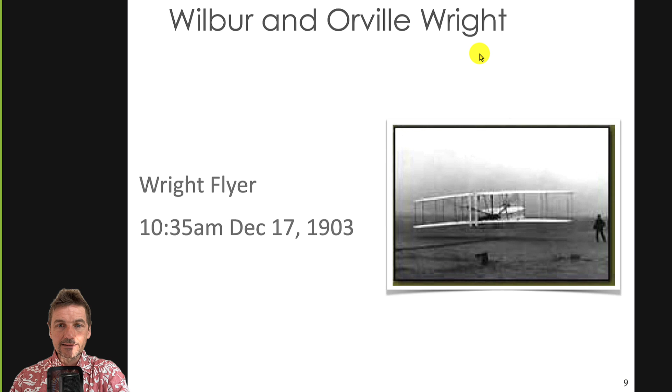So in our technology history, we have a very well-known pair of brothers, Wilbur and Orville Wright, who are the first people in our continent to have flown. That was in December 17th, 1903. They actually did a coin toss because they wanted to know who would fly first. Wilbur won, and so he started.

Unfortunately, the plane stalled and could not go further. Orville actually made the first flight, and that was on December 17th, three days later. That flight was about 12 seconds and 120 feet, so as you can imagine, that was really quite short as a flight.

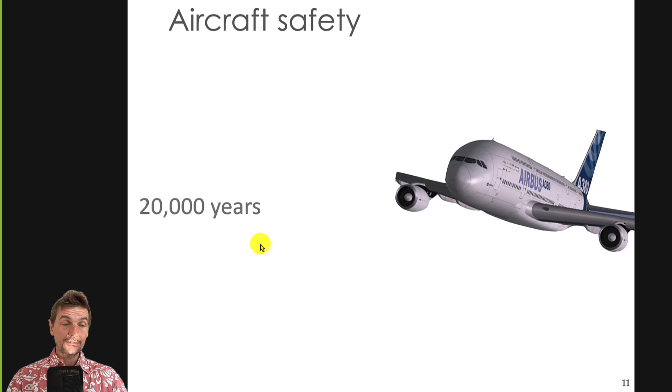So this is just to tell you where things started. Today we are quite a long way away from this, because we could, as you can see, fly for 20,000 years without having an accident. If we flew continuously for 20,000 years, statistically we would have no accident. So it means we can safely fly during our life, and most likely we will not have an accident.

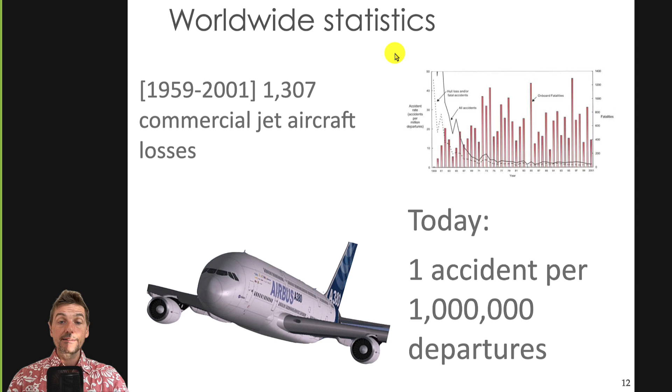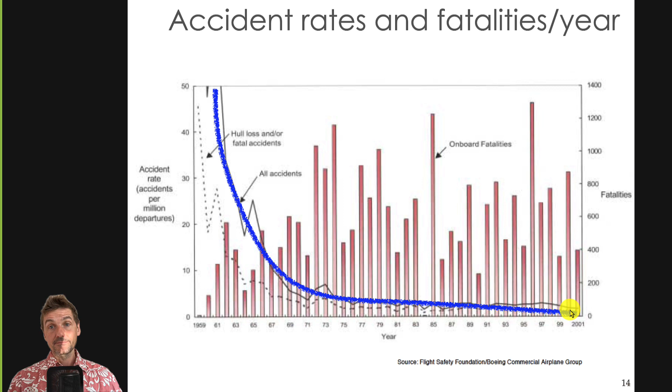If you look at the number of accidents per departures, you have approximately today 1 per 1 million. So every 1 million planes taking off, you have one accident. So it's really very few. And if you look at what happened over the years, the number of accidents is decreasing significantly, and usually these accidents are due to human error. They are not due to something else, right? So there are plenty of examples of this.

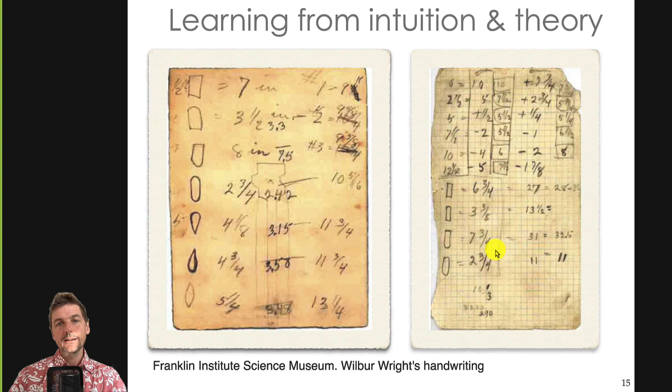Originally we were really working from intuition and theory, and from experiments as well. These are the notes that the Wright brothers had, in the Franklin Institute Science Museum, and this is Wilbur's handwriting. You see here he thought at some point that you should have a square section for the wing, or maybe at the end he thought about that section. He did some calculations on the side to figure out the best version of this. I thought this is very useful to think about, because not only do we work from some sort of intuition, since the mathematics weren't there yet, but we also learn from experience.

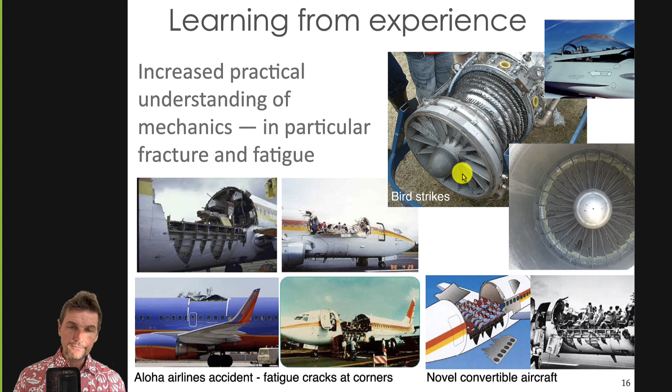As you can see, you also have bird strikes, which can completely destroy the engine. All these things are very useful to know, because you cannot predict them until they happen. So now they are doing experiments on Rolls-Royce engines where they throw real birds inside the real engine to figure out how it works, and they also perform numerical experiments of that type of engine being hit by a bird.

The other thing which taught us a lot about fracture is the Liberty ships. This was during the Second World War. You may know that the US were bringing a lot of food to the UK using boats, and these boats were usually the target of U-boats, the German Nazi submarines, which were targeting these boats to get rid of the food and other things being brought to the continent and to the UK.

That was a very good idea, and on top of that, because the boats were sunk so frequently, a lot of boats needed to be rebuilt. What happened is very interesting. You may wonder what could possibly have happened to these different boats because of the way they were built.

So this is very interesting, and I think it's worth thinking about, that we learn from intuition, we learn from design, we learn from experiments, and we learn also now from science and mathematics and mechanics, but all these things took really a long time to be built.

If you look at the terrible cases of shuttle crashes, again, these things happened because of very small details, like in that case, it is believed to be due to one of the little squares on the surface of the shuttle, which was slightly off, and that created some sort of problem during the flight, during the takeoff, which then led to the destruction and killed the astronauts. And this was also due to very small, minute problems in the structure of the aircraft.

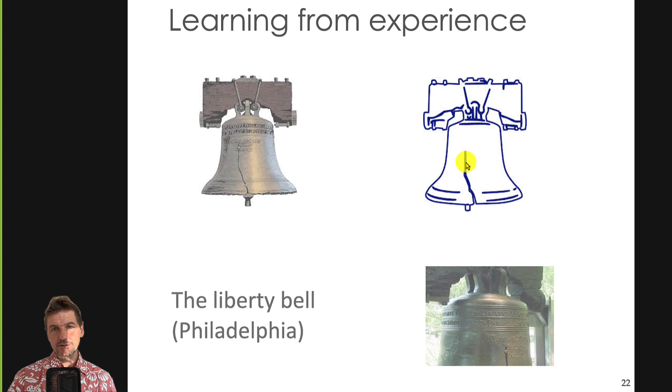Similarly, if you look at the Liberty Bell, which was in Philadelphia, people were wondering how to arrest a crack, and what was done is something that's quite counterintuitive. The bell was taken and a little hole was dug at the crack tip, because by digging a hole, you can decrease the stress intensity factors, decrease the energy available for fracture, and therefore the crack will not propagate. So this is something really interesting also to keep in mind.

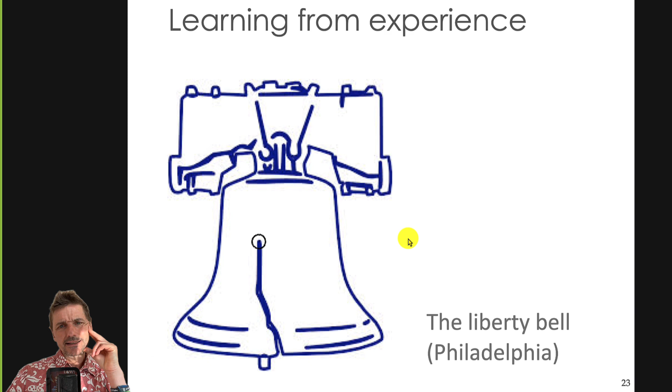So one of the key questions that you have when you work on fracture of homogeneous materials, but fracture of any material in general, is the question: when should a structure be inspected for flaws? How do we figure out when a structure should be inspected? Should we do it every flight, every million flights, every 10,000 flights, every 100,000 flights, if we're talking about an aerospace structure, for example?

So these are the questions we want to address, and how are we going to address this? One of the most simple ways is to assume that a pre-existing crack lies in the structure, with a certain size fixed by the design codes. Once you have that crack, which is fixed at the beginning, it will propagate according to a certain type of rule using certain types of codes. This is very codified and done in very strict ways.

For example, one of the codes used in the US by the FAA is called NASGRO or AFGROW, which is a code that will tell you, based on the principal stresses in the plane where the crack is located, how many cycles it will grow, and it will give you an idea of the shape of the crack.

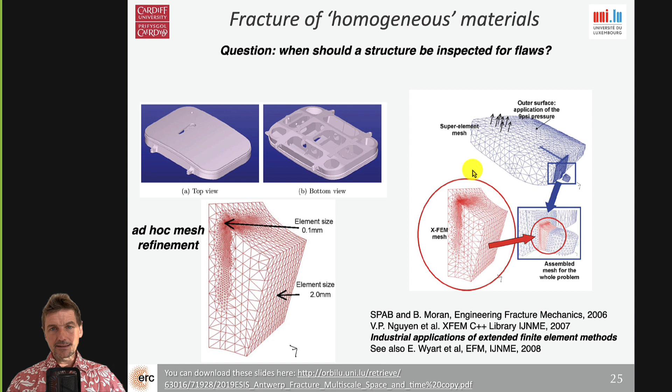So my method, which was designed by myself and my supervisor, Brian Moran, allowed us to look at much more realistic cases, which in fact led us to different fatigue lives and allowed us to make very nice work forward in that area. And now these ideas are implemented in commercial codes, for example, at Cenaero in Belgium.

The second question about how to look at fracture of homogeneous materials is how do you deal with the accuracy of your simulations? If you look at a homogeneous material, you have certain assumptions - you will assume that the fracture is linear elastic, usually for aerospace cases, because plasticity is forbidden in these design codes. Plasticity would actually help dissipate energy and decrease the crack propagation rate, and what is wanted in aerospace is a very conservative approach to ensure you have the worst case scenario at hand.

To know more about this, you can refer to the short course on partition of unity methods and free boundary problems, where we discuss how to go around the problem of meshing the cracks as they propagate. There are many approaches, including finite element methods, extended finite element methods, mesh-free methods, and boundary element methods with isogeometric analysis, which is here. This needs to be done in detail, which I refer to the course on partition of unity methods.

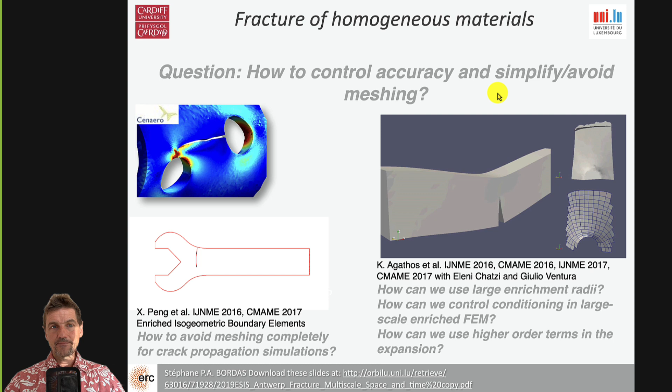Similarly, in the course on partition of unity methods, we talk about goal-oriented adaptive methods, which allow you to refine the mesh locally around the area where you think the crack is. Before these methods were incepted, during my PhD, what people needed to do is put a crack somewhere, and the mesh in the whole region where you thought the crack would propagate had to be pre-generated in a very dense manner, with very many elements in the whole volume where the crack would propagate. This is of course very inefficient, and quite brute force.

The idea of using adaptive computational methods is that you start with a crack as dictated by the design codes, but the mesh is only refined in the vicinity of the crack, not everywhere. As the crack propagates, it leads to refinement of the mesh only locally around the crack front, as you see here, not everywhere else where it's not needed.

The novelty in what we did compared to others is that we targeted the stress intensity factor. We did not target the energy, which is meaningless, but the stress intensity factor, which is the crack driving force. This is what allows the crack to propagate or not if we reach the critical stress intensity factor, and under fatigue conditions, it allows it to propagate at a certain rate, because as you can see in the short course on fracture mechanics, the amount by which the crack grows in models such as Paris law is directly proportional to a certain power of the stress intensity factor.

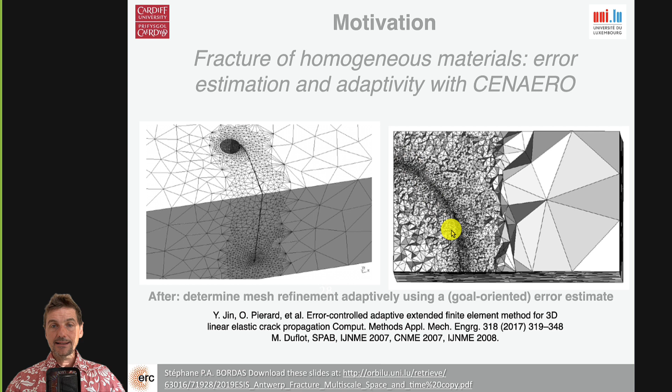We saw at the time that if the stress intensity factor is computed slightly off, then the whole crack propagation path can be wrong, because each increment will be off and you cannot heal the crack. Once you've made a mistake in the propagation, you have a history-dependent simulation which cannot be cured. So this is very important - think about error estimation and adaptivity with a goal in mind, as opposed to simply doing adaptivity using, let's say, energy as a target.

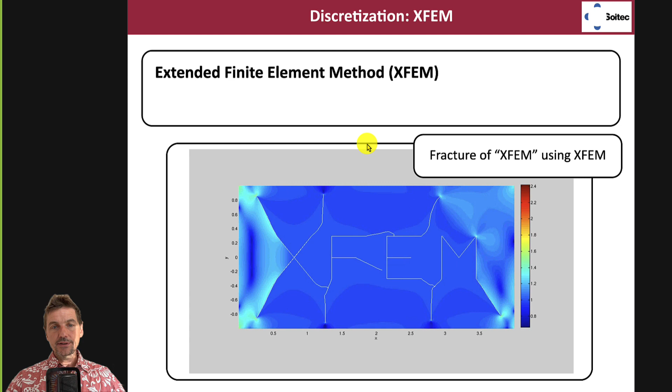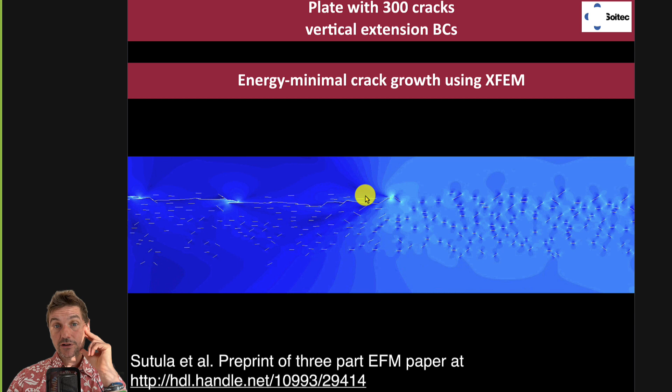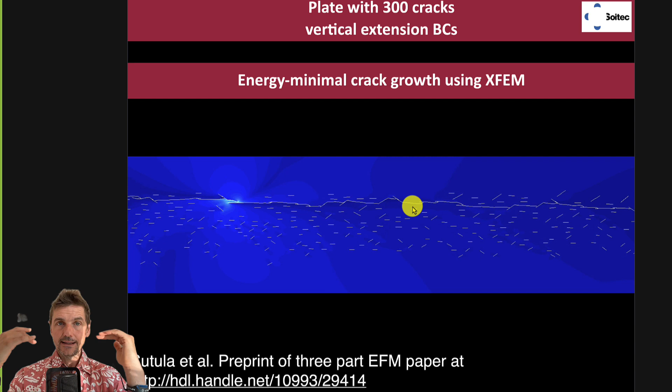We also talk in the partition of unity method course about the extended finite element method, one of the ways you can discretize fractures. We also talk about the fact that if you have multiple cracks, like here 300 different cracks, the idea would be to figure out which crack should propagate to maximize the energy release globally - to minimize the potential energy in the best possible way. You don't know which of the 300 cracks, or which of the 600 crack tips, should propagate. The work of Danas Sutula, which I explain in the partition of unity course, clearly shows how to do that systematically for as many cracks as you like, in a very nice and beautiful way, all implemented in MATLAB and available for free. That led to extremely nice results.

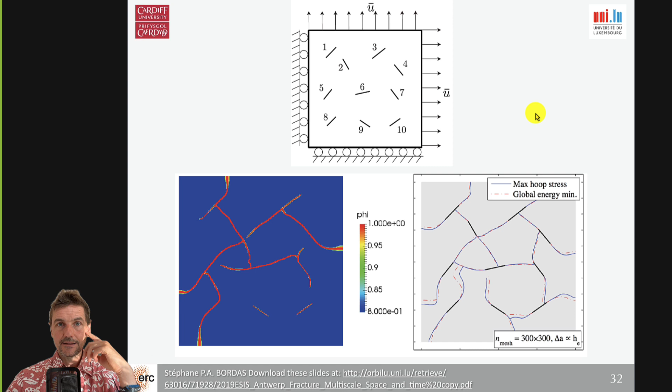We also talk in the partition of unity course about the comparison between energy minimal fracture and phase field approaches.

We talk about the fact that we can look at arbitrary materials that can also be inhomogeneous. This is now the first step into inhomogeneity. What you see here is a solder joint that's used for printed circuit boards.

You can imagine that current is going to flow from the top to the bottom, for instance. This is a tin silver copper alloy, and these tin silver copper alloys make polycrystalline grains. They have grain boundaries, and typically the grain boundaries are the areas which are the weakest, so they are the areas where the cracks will tend to propagate.

So this is why, in that case, we have a model where the cracks initiate along the interfaces. We compute the damage around the interfaces, and when the damage, due to mechanical thermal fatigue, increases beyond the threshold, we crack the whole grain boundary.

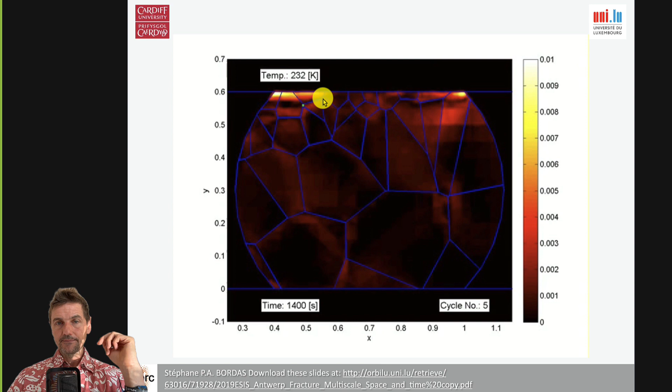And then we look at the propagation of the cracks, and what happens is that at some point a crack will grow, and all the small cracks will coalesce, and the whole grain, the whole solder joint, will be failed.

Now what happens here is that we have one solder joint and we have all the grains taken into account explicitly. On a printed circuit board, you have hundreds of these solder balls. And what we would like to know is when they will fail, because that can lead to electric defects in the car.

Due to the car starting and stopping several times a day, and the cold climate, they start at cold temperatures and heat up at high temperatures several times a day, these solder joints can fail, and when that happens, you have red lights lighting up on your dashboard. So the question is, when is that going to happen?

Note, this is very important, that here the grains are of the same order of magnitude in terms of size as the structure. You see here the structure is not much larger than a grain—maybe 5 grains in the length and 3 grains in the vertical direction, depending on the grain size. That's very important, because here we have, and this is a keyword I will use today for the first time, no scale separation, because all the grains have a size similar to the size of the structure.

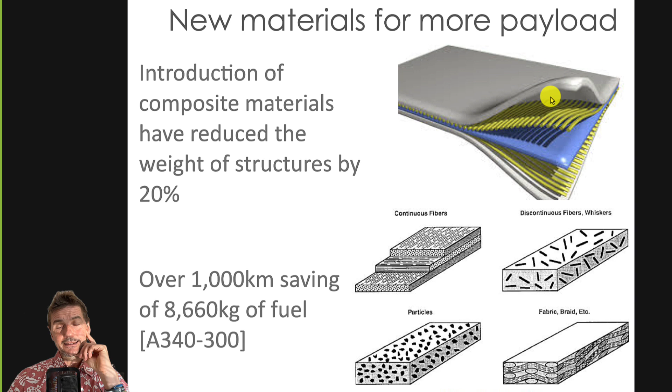So now I've convinced you, I think, that there are different types of multi-scale approaches. There are some problems where the size of the microstructure is similar to the size of the structure—that would be, for example, the solder joints I showed. But there are other cases where it's not the case.

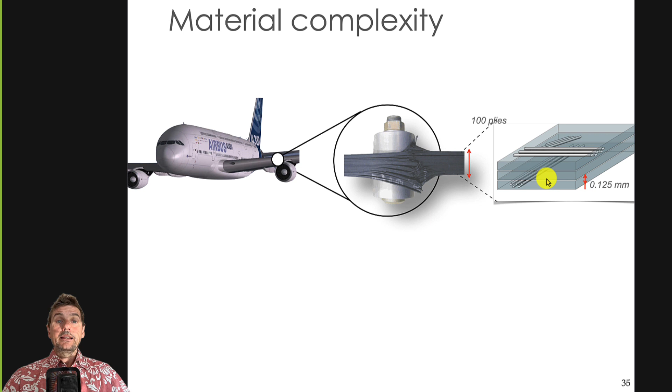For example, here you have a bolted joint, 50 millimeter bolted joint, 100 plies, 125 microns per ply, with nanoscopic fibers. If you look at this particular case, you have a heterogeneous multifunctional material, and you need a certain number of experiments, similar to Paris law, to be confident that the coefficients of Paris law that everybody uses, C and M, are correct.

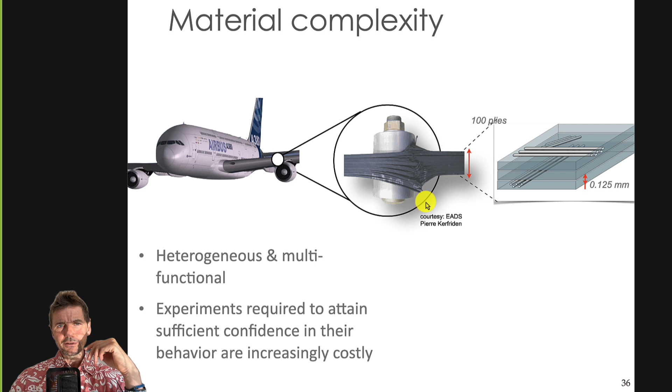Thousands of experiments were carried out. So here, in order to gain understanding about these bolted joints and these materials that we built, a lot of experiments and numerical simulations are also required.

So how can we do that? Well, one of the problems is that we have quite a different environment in real life than we have in the lab. It's quite difficult to reproduce the environmental conditions. So those are quite difficult problems to solve.

The second problem is factor of safety approaches. Let's say we computed 10,000 flights for the Airbus. Since we computed 10,000, we put a factor of safety of 2, so we say it's not 10,000, but 5,000. We are conservative, we try to decrease the risk. This is what you typically do in engineering when you don't know something. What you do is you lump all the unknowns into what's known as a factor of safety.

Also known as probabilistic-based methods, but these things cannot handle unknown unknowns, because there are things you don't know that you don't know. For example, the fact that you will maybe have some sort of storm - you don't know exactly when. You don't know the hygrometry, the temperature exactly, the wind patterns. You don't know everything that goes around the plane.

But there are many things you cannot guess, because the airplane may be flying in environments you have no idea about. It can actually be easier to understand if you think about spacecraft that will go explore the universe, because in that case you do not know what will be found there - you've never been there, and you don't know the conditions in terms of cosmic radiation, atmospheric conditions, corrosion, bacteria, viruses, temperature, or even simple chemical reactions that can take place there.

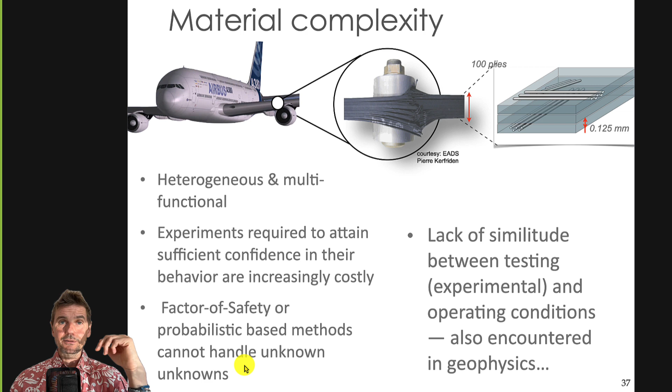So it's very important to realize that the more you can guess, the better. But it's even better than not guessing to put sensors on the structures. And the question is which sensors, in order to be able to make proper designs.

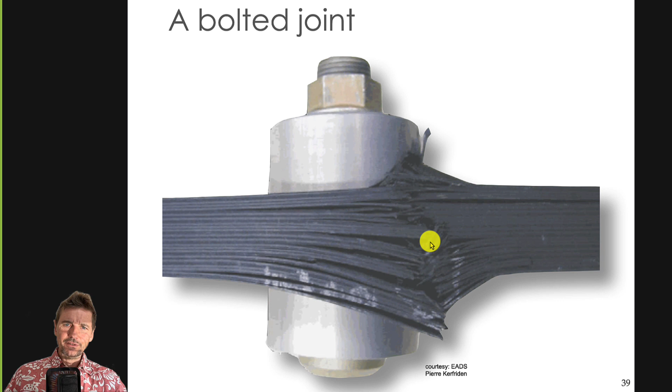So now let's look at numbers. If you take a bolted joint from an Airbus A380, for example, you have a mixture of metal and these carbon fiber composites here. When these things fail, this is what it looks like - not very nice. You have delamination, debonding, the fibers get loose and get pulled out of the matrix. These things are extremely negative and detrimental to the life of the structure, so you would like to be able to predict this.

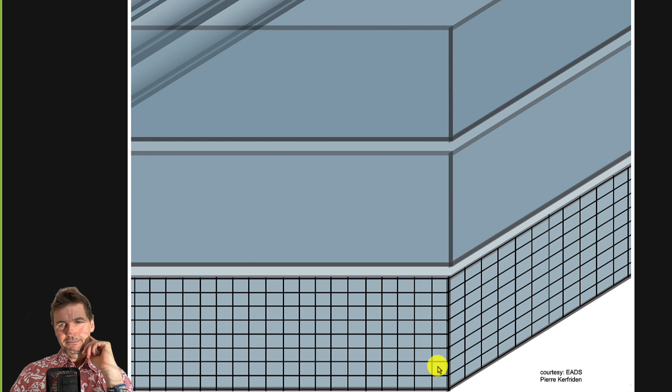So let's just look at a brute force calculation of this bolted joint. How many degrees of freedom do you think that's going to require? Let's look at just a few plies, and assume about 10 elements per ply - that could be overshooting, but let's assume that. If you assume a 50 millimeter bolted joint, that's about 2,000 elements. Say 50 millimeters by 50 millimeters times 100 plies in the thickness, which is typical - in the end you get 2 billion elements.

So 2 billion elements is something which is solvable. You can solve that on supercomputers today, if you have the proper code, of course. It would also need to be a fully parallel code using MPI and domain decomposition and so on. That was the PhD thesis of Pierre Kerfriden at LMT Cachan in Paris, École Normale Supérieure. But this is, I have to say, a bit brute force.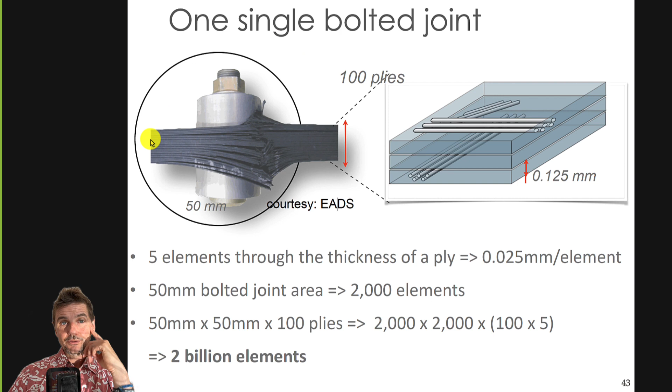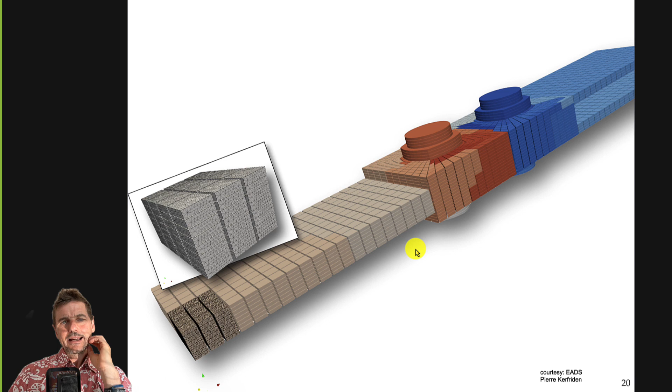So what you'd like to do is reduce this complexity, to be able to solve such problems much faster. This is the PhD thesis of Pierre, as I was saying. What he did is divide all the plies into sub-blocks, and each block was sent to one CPU. In this case he had something like 450 or 512 CPUs, if I remember correctly, and he could solve that in 1 week at the time - so in 2009.

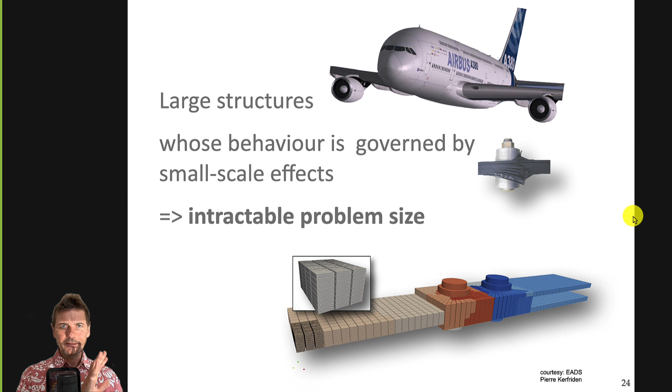So this is exactly the problem we're trying to address today: how do we deal with large structures whose behavior is governed by small-scale effects that lead to intractable problem size? This is the question we would like to address today. And again, we will do it via two ways: one will be algebraic-based - model order reduction, artificial intelligence, machine learning - and on the other hand, it will be done using mechanics and physics-based methods only.

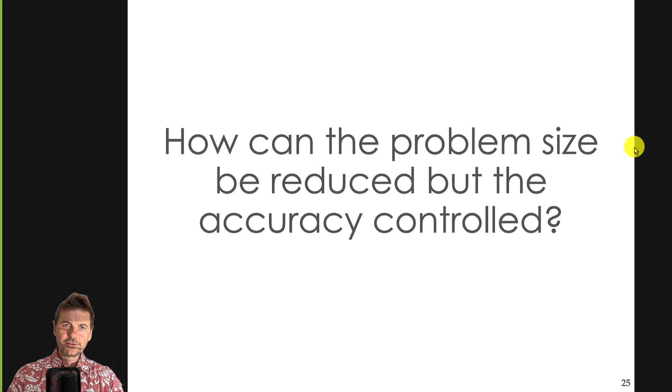Here's the question: how can we reduce the problem size but keep the accuracy under control? So how can we do this? This is really the question that we need to answer.

So the first thing is that we have a certain challenge. We want to preserve certain features and reduce the problem size at the same time. And that will allow us to reduce the computational expense and therefore control the error.

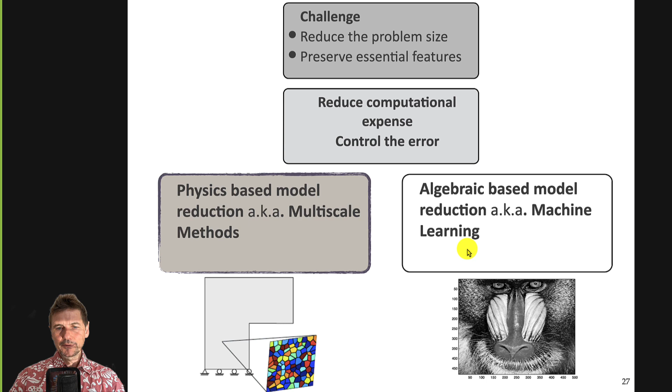We will talk about two approaches. One is physics-based and the other is, let's call it machine learning based, but we could also call it algebraic based. And let's understand why there is a nice monkey on this picture. But we will do that after we have talked about physics-based approaches.

In the next part of the talk, I'm going to convey to you what means lack of scale separation, and I'm going to do it from both the reduced order modeling and from homogenization, meaning the physics-based approach. And I'm going to link these two together.

Remember in the course on how to create a mathematical model and how to discretize and how to control the discretization error using a posteriori error estimates, and the model error using appropriate models for the problem that you're solving, and trying to address the question: are we solving the right problem? And the verification question: are we solving the problem right? Meaning, are we solving the PDE properly? Is it converging? Is the solution accurate enough?

Can we capture the discontinuity or the singularity in the solution? That's the discretization error. And the model error, what is the question to the validation? Are we solving the right problem? So today, which of the two questions do you think we are asking?

We are talking about multi-scale approaches. So we are mainly asking the model error question, because we don't know whether we should have a model at the coarse scale only, like for unidirectional composites, the thesis of Lisa Cahill that I showed before in the fracture mechanics course.

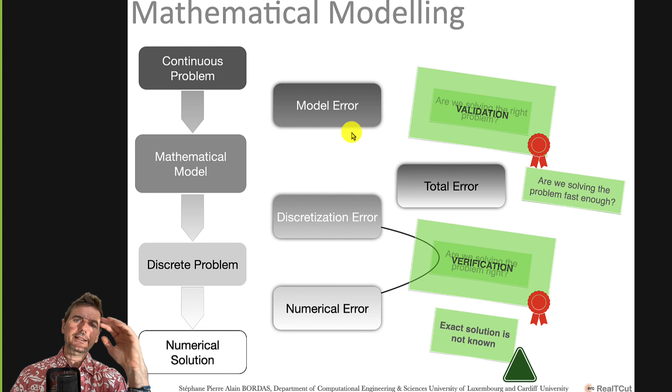And we don't know if we need to take into account all the grains, like in the solder joints, explicitly, all of them. Or we don't know if we could maybe do some averaging and have a few grains taken into account and then use homogenization to do it. So that we don't know. And this is the question we are trying to address today.

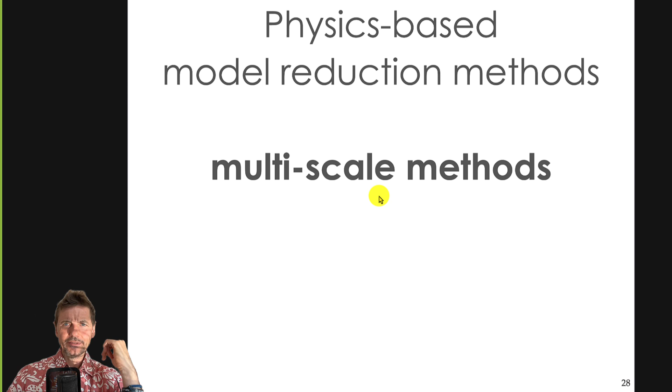So to do that, we're going to look at the first class of methods that I call physics-based model reduction methods. And I'm going to explain why I believe that the name physics-based makes sense. First of all, let's look at a typical example.

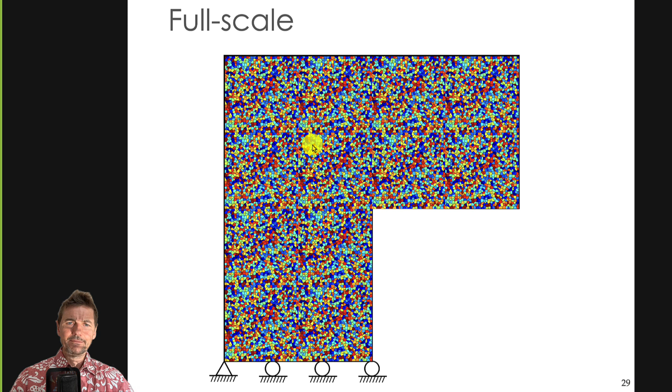By taking explicitly into account all the grains, knowing, and this is very important, that each grain here that I choose will have different properties to the neighboring grain. Point number one, it will be anisotropic. It will have a specified direction which is of interest, and only of interest to that grain. The neighboring grain will have completely different properties.

It will have completely different fracture properties, completely different dislocation dynamics, completely different Young's moduli, so elastic properties, Poisson's ratio in different directions, so stiffnesses will be different. Temperature parameters will be different, coefficients of thermal expansion will be different. So everything will be different in these little grains. There are no two grains in there that are the same. They are all different in shape, different in material properties.

And not only that, that would be too simple, but if you keep zooming, you will see that there is an interface. And this interface between the grains will also be different for all grains. So there are not two interfaces in there that is the same. So you can imagine the problem complexity of dealing with hundreds of thousands of grains with dissimilar interfaces, dissimilar material properties at each grain, and doing that on hundreds of thousands of grains in one structure.

And we're talking about 2 dimensions. If you think about several dimensions, like 3 plus time, then you immediately understand that there are some severe difficulties in dealing with that.

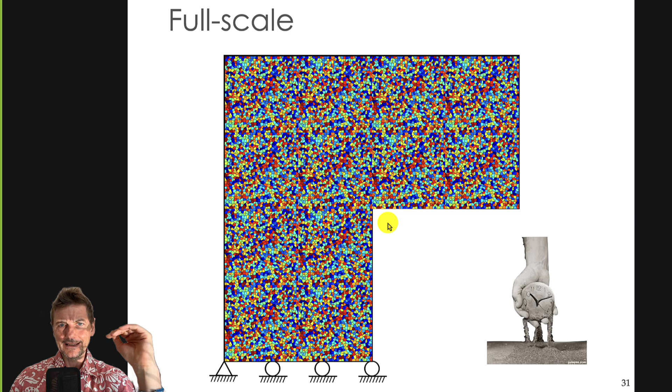So now you would like to replace this particular microstructure by a PDE, a partial differential equation, with constant coefficients. So you see here, big problem. Here everything varies all the time.

So if you were to draw some sort of variation, if you take a line from the left to the right and draw variations of any of the properties, you would see a huge amount of variation. It would jump up and down constantly. Now what you want is one PDE with constant coefficients in there. So of course that is the main difficulty of multi-scale approaches.

So how do you do that? Well, the thing is, you try to replace the heterogeneous nature of this problem by something smoother, and you do that at the scale where the predictions are required. For example, you would like to just send your simulation in a computer, go take a coffee, come back, and boom, you have the solution.

How do you do that? Well, the idea is that at each material point in the structure, you will have one point which is represented by another volume, supposed to represent what happens at that material point. Which means if you go to another point, you will have another volume which represents another material point.

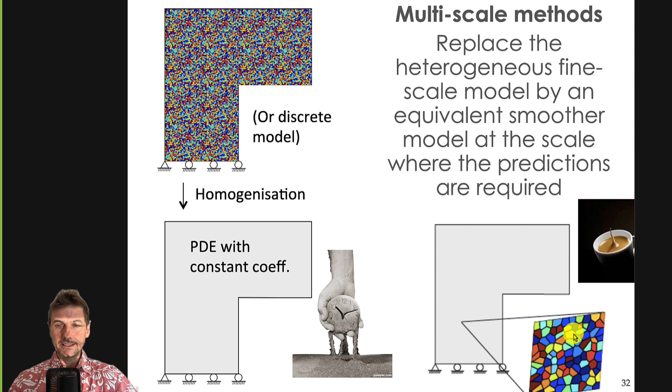In some region you have a full description of the microstructure, and in other regions you don't. This is known as concurrent methods. And the difficulties in concurrent methods—you guessed it—what would you think the difficulties are?

Well, yes, the difficulties are the interfaces between the two domains. Why is that? Because you need to make sure that you keep continuity of the field variables across these two different representations of the domain.

Here on the left-hand side, you have to deal with a continuous and constant coefficient PDE. On the right, you have discontinuities through the grains, and you need a continuous transition between the two. Otherwise you'd create a jump in the displacement field, which you don't want, and a jump in the strain field, which in that case you don't want either.

So if you create jumps or incompatibilities between the two domains, depending on what problem you're solving, you are not addressing the problem properly. So you need to make sure that works.

The second problem you can have at the interfaces is looked at in detail by papers by Belytschko and others at the time, in methods known as the bridging scale method or the bridging domain method, where he's trying to merge two domains.

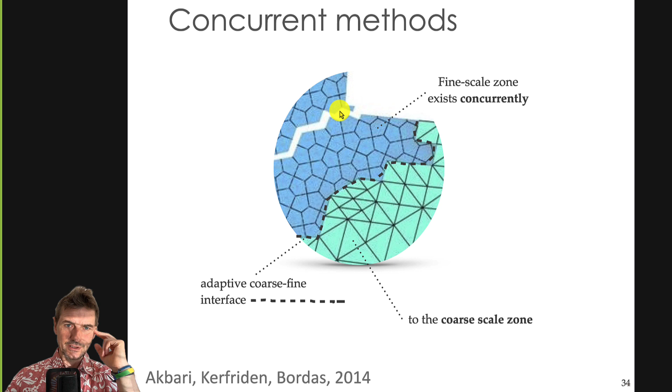So these are concurrent methods, as I was saying. You have an interface that you need to take into account, and you have a coarse scale zone and a fine scale zone. In the fine scale zone happen all the things that you're interested in, for example crack initiation, crack propagation, and so on. So I think this is extremely useful to know.

As I said, this can be done for molecular dynamics as well. Here you have a fine scale zone, and this is reported in the paper by Talebi, Ramaia, Rabczuk, Bordas, and Kerfriden in 2014, now 9 years ago. What we did there is we had a molecular dynamics region, which was coupled to a full finite element region, which you can see here. What was happening is that the crack was propagating in the molecular dynamics zone, which allows you to use a full-fledged molecular dynamics approach in order to initiate and propagate the cracks. So it's very desirable, of course much more expensive.

Similar to the coupling between mesh-free methods, where you have particles, here you have molecular dynamics, so you have atoms. The connection between atoms and particles is quite close, so you can think about them this way. And then you have an interface where you attempt to conserve energy. This is the main point.

And then once the crack has propagated, the idea is that you do not want to keep all the particles, all the molecular dynamics atoms, behind the crack wake. Because behind the wake of the crack, you don't need all these atoms anymore. Nothing is going on. Once the surfaces have separated, the potential energy here is not important anymore, so you can just get rid of the particles and you can coarse grain.

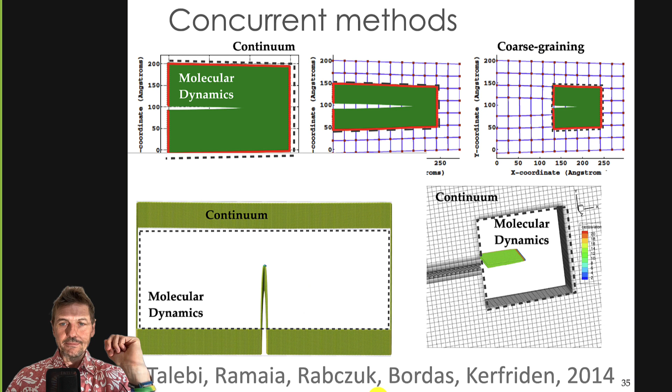Again, it's in this paper, and we show how things work. So that was for concurrent methods. That was a very short introduction, and I will do another lecture with more details on this. So this is only now to show you what you can do in terms of not concurrent, but now semi-concurrent or hierarchical methods. Let's try to figure out why it's called hierarchical methods.

So the idea in hierarchical methods is that you have one domain which speaks to another domain. So there is a hierarchy in the domains. There is a domain at the coarse scale, so large scale, and there are domains at the fine scale, like the representative volume elements. And the question is, how do you link the fine scale to the coarse scale?

And so this is how it's done. Let's imagine that you have a mechanics problem at the coarse scale, so you have finite elements. And let's imagine that at each of these points in the elements, you can think of them as integration points, so material points. Each of those points is now associated with a representative volume element, which on purpose I did not define properly because this takes a long time to define properly, and it's still subject to discussion.

But suffices to say here that you have a representative volume element, meaning that this is the smallest possible volume which represents the statistical variability of the fine scale. Meaning if you take it larger, it is too large, and if you take it too small, you do not see the statistical variability. For example, a typical representative volume element could not be smaller than one grain, or an aggregate in concrete. It will need to handle at least a few aggregates and some of the cement paste, such that you have a good variability in the aggregate size, that you have at least a few aggregates, and that you have at least some of the cement paste. So that sounds like heuristics, and it is, but in reality you have some very clear tests to make sure that the representative volume element is indeed representative, and to know when it's too large or not, right?

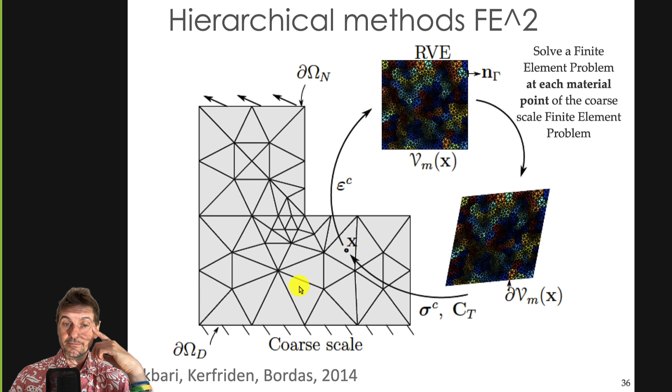So that's the key about hierarchical methods. And now we're going to see when hierarchical methods break down, because of course they do. All methods break down at some point, and we would like to see how it works.

So the first question is, what happens? Here we have two axes: sigma c and epsilon c. C stands for coarse, because we are living at the coarse scale at point x in a finite element at the coarse scale. And what we are drawing is the loading of this element. So we are considering only one element that contains one point x, and at that point x we are increasing the load. Or you can think of it as increasing epsilon c, because we are computing at this element the displacement field at the three nodes, u1, u2, u3. Based on the shape functions inside that element, we are computing the strain field at point x.

And based on that, we are passing the strain field computed by shape functions to this representative volume element, and computing the stress field and the tangent stiffness. The displacements on the boundary of this element are varying because we are increasing the load. So we may start with a small load of 0, then we increase the load, and we will follow that curve. What we are doing basically is drawing the stress-strain curve for that point without having any analytical formula for the stress-strain curve. If you take into account elasticity, the stress-strain curve will be a line.

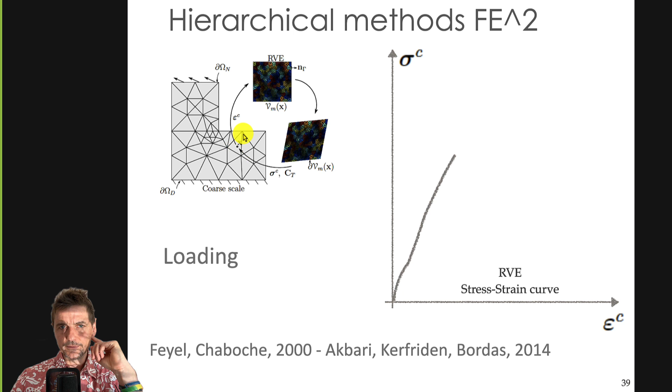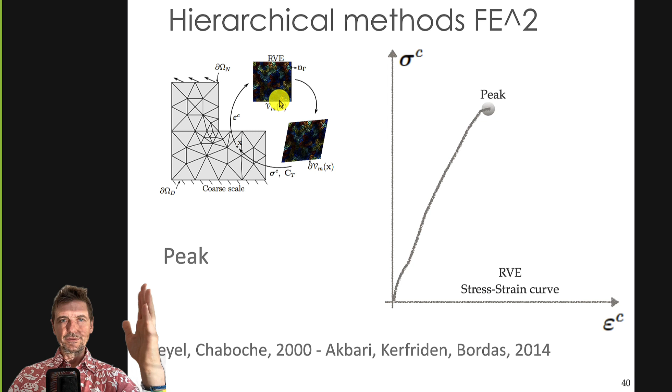We keep loading, we end up at that new point. We keep increasing the loading on that edge, which increases the displacement on these three nodes. We keep loading, and at some point we reach a peak, which means the highest stress that point can see. That's due to the fact that in these RVEs, you may have fractures, damage, all sorts of problems taking place. You may have irradiation and dislocations forming, or atoms missing, or atoms completely thrown out of the lattice. And so you end up at a peak.

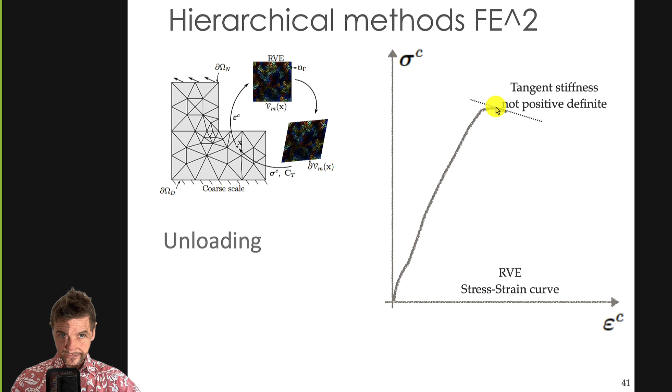This is where the problems take place, because now you have a material stiffness tangent, d sigma c, d epsilon c, so partial sigma over partial epsilon, which is now negative. And why is that a problem? Well, because you're solving a partial differential equation here, which is an elliptic equation, meaning that certain coefficients need to be positive for that equation to be elliptic. Now that particular coefficient, the stiffness, is no longer positive, it's negative.

This is really nice, because you have a way to figure out when the material fails. If you're interested in this, I highly encourage you to read the book by Ray Ogden, because in chapter 5 of his book, Nonlinear Elasticity, he has a very detailed description of loss of material stability according to the acoustic tensor. I'll also give you references on meshless methods by Ted Belytschko, because he came up with ways to initiate cracks using the acoustic tensor, and we, with Timon Rabczuk, worked on that in 2007 in a series of papers on element-free Galerkin methods, where we initiate cracks using similar approaches. It's something really pervasive in the whole literature, both at the material level and at the computational level.

In any case, what happens here is that at the coarse scale you would like to introduce a crack, because you are starting to damage the material. So at the coarse scale, you would like now to fail that element. The problem is, how do you do that?

Because if you don't do anything, when you have this localization, you will have localization of strains, and this element will damage. Unfortunately, your results will be mesh dependent. If you refine the mesh, the element will also damage, but now it will be a smaller element, and you will localize in a smaller element. If you refine the mesh again, you localize in yet a smaller element until the element size goes to zero, and the localization happens in a set of measure zero, an element which is infinitely small. Therefore the energy that you dissipate damaging the material is now zero, which is contrary to physics.

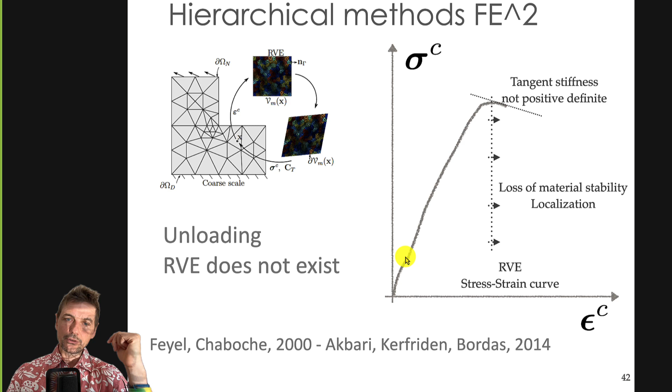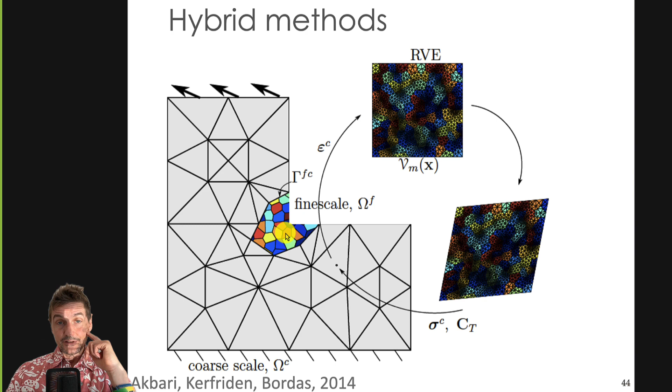So you want to reload all the microstructure here until you get to this point, which is a very difficult thing to do because you need to unload everything and reload everything now with the real microstructure, which is extremely computationally intensive and would need to be accelerated, maybe using methods such as machine learning. So this is still a very open area of research, which today still leads researchers and engineers to scratch their heads day in, day out to try to figure out ways to do that properly.

And now what we're going to do is look at a few examples.

In multiscale methods, there is another keyword which I will introduce now, known as direct numerical simulation, or direct numerical solution. What that means is that instead of using the reduced version, meaning the multiscale version, you now use a full detailed model.

So meaning you put all the grains that you think are in this area explicitly in, and this is what you use to make the simulation, as opposed to doing what we just said, meaning having this adaptive multiscale approach where when the elements have failed because they reached a peak, you replace them by the full instance of the microstructure. So this is essentially what we are trying to do here.

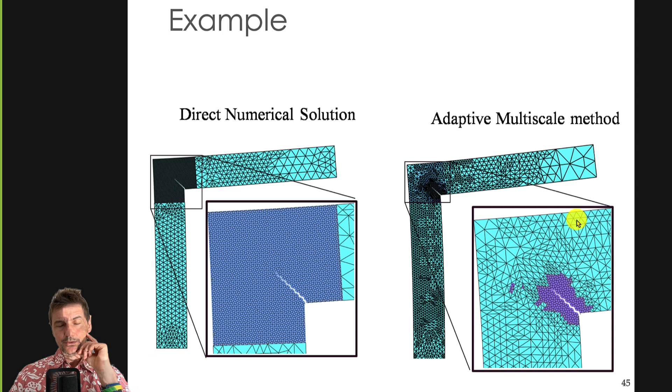So let's now try to understand how you can compare these two approaches. We will take that particular region, apply loads, and based on these loads, we would like to figure out what the deformations will be like. And we would like to compare the energy dissipation and the force displacement curves.

Also important, we have 20 to 100 times fewer unknowns in 2D, and 3 orders of magnitude fewer unknowns in 3D. Well, that tells you quite something. So in terms of complexity, I think it is very important to think about that.

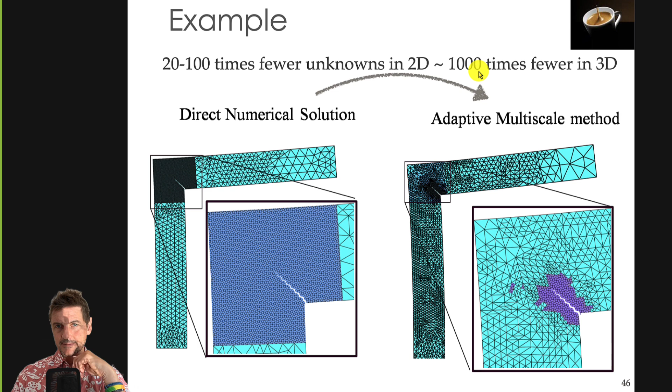Okay, so now what happens if you take first a very simple example known as uniaxial tension. That's going to be very simple to understand, and this is what I would like to show now. So we have a notch in a specimen which we are pulling upon, right? Sizes are in millimeters, so quite a small specimen, and you have here a notch.

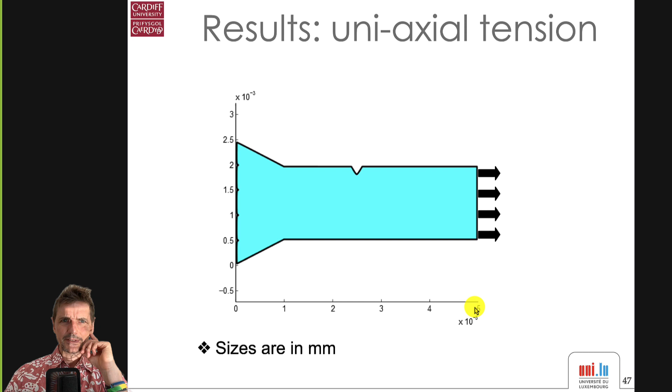Again, quite a small specimen, something that's quite usual in computational multiscale methods, because looking at large scales is often very difficult. And so the more detailed the model is, the more difficult it gets.

Meaning that if we want to have really a predictive model, what we need here is a stochastic simulation. What we would need to do is a Monte Carlo simulation where we choose a different microstructure every time, and run the simulation to find a crack propagation path and the energy dissipated, the area below the force displacement curve.

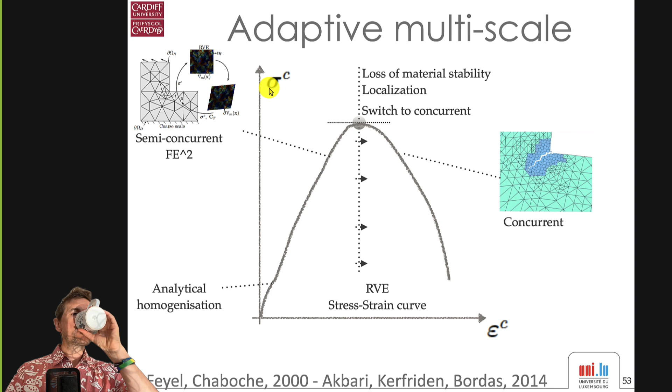Okay, so now what is the major approach if we summarize everything we've said till now? We start with a semi-concurrent finite element square approach before we reach the peak. In some cases, you may even start with what is known as analytical homogenization, which boils down to computing average parameters for structures. You compute everything by hand, you do not need to compute anything numerically, which is numerical homogenization. Analytical homogenization requires only hand calculations based on averaging, theories of averaging like the Mori-Tanaka scheme and so on in micromechanics.

So you can do that first, as long as there is no change in the microstructure. For example, if you have cracks taking place, or if you have dislocations or damage taking place, the analytical homogenization is no longer possible. You need to move to numerical homogenization, computational homogenization, this is the way it's called, and this is known as semi-concurrent. So you start by analytical, maybe, if nothing happens in the microstructure.

As soon as cracks start to appear or damage takes place, you need a semi-concurrent approach, because all the points are behaving differently. If I take a point here, nothing happens—we are still loading, so analytical homogenization is enough. But close to the L-shaped corner, we know we'll have stress concentrations, so most likely damage will take place, accumulating, fractures initiating, propagating, joining, merging, coalescing, and so on before we reach the peak.

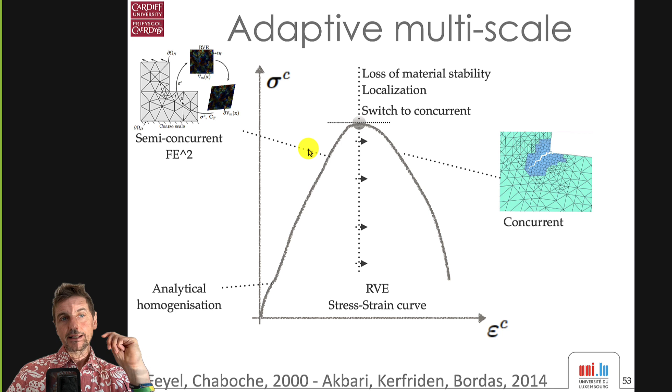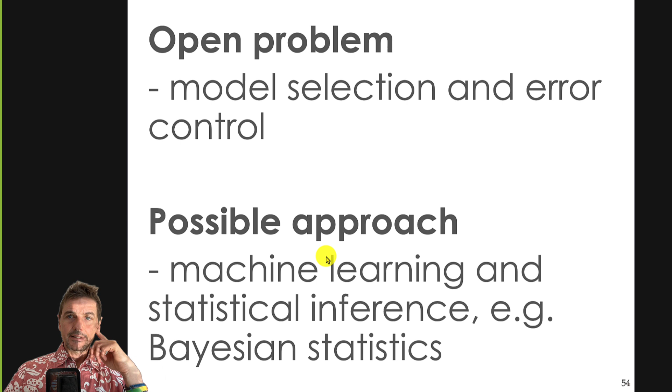When we get too small in terms of element size, close to representative volume element size—for example, close to a grain size—we switch to a semi-concurrent approach and to computational homogenization. Every time we reach the peak, we switch to a concurrent approach. So that's the idea. The problem is to do that systematically. What we could probably do is use machine learning and statistical inference, and we could talk about that in further lectures, because we have some recent results in this direction.

Another open problem that I want to mention again for the third time is the statistical variability at the fine scale—geometry, material parameters, and so on—which definitely need to be taken into account. There are different aspects, because we have statistical variability. First question: how do we identify this variability? How do we know what the material properties are? This is not so trivial.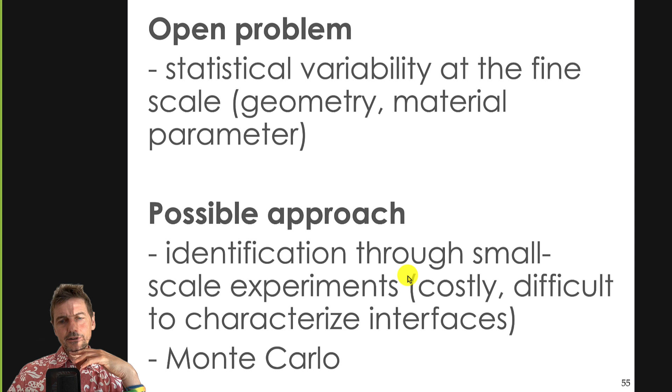The second question is, once we've identified that through small-scale experiments, we can use Monte Carlo analysis, meaning we can throw some dice and use the probability distributions for the material parameters we've identified in order to solve the problem multiple times. So I think that's basically what I wanted to say on these physics-based computational approaches.

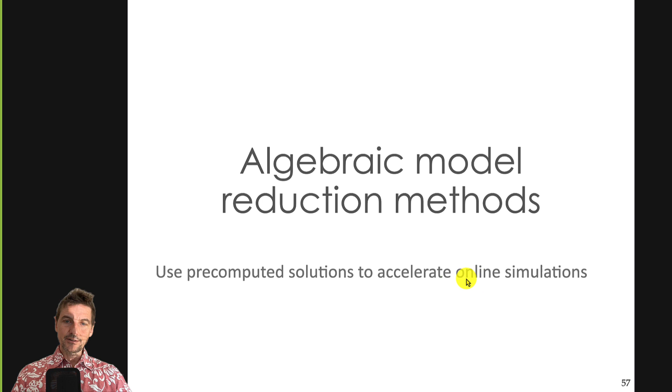Now I'm going to tell you about ways to reduce these problems using algebraic model order reduction, which are based on pre-computed solutions, pre-computations, in order to accelerate what are called online simulations. Online means when you want to make the prediction. Offline in this jargon means before you want to make the prediction. I will make that clear in the forthcoming slides.

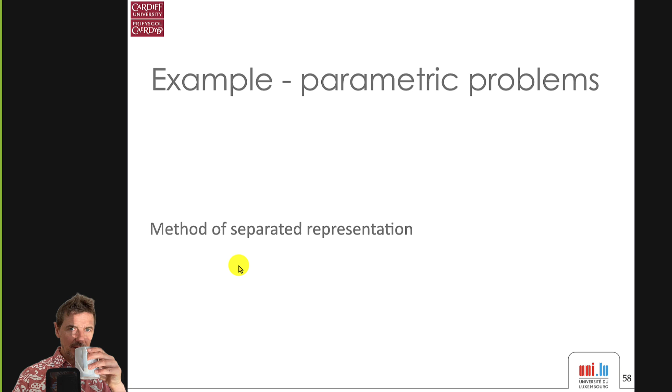And the problem is that you do not know what will be the load that the client gives you. Let's imagine you are in a design office and trying to design this beam, but you have no idea what load the client will give you. They will come to you with some loading they came up with using their own methods, which you don't know about, and they will come up with a load, maybe 1 meganewton.

That's it, that will be the load, but you don't know what the load will be. You know this client is going to come next week, and when they give you the load, you will have 1 hour to compute the solution.

Of course, the problem looks very coarse and simple to calculate. It will probably take 1 second to simulate. But let's imagine, for the sake of argument, that instead of thousands of beams, we have billions of beams, that the problem is really huge, like the microstructure problem with tens of hundreds of thousands of grains. Let's imagine this is a similar problem, and it is very, very long to solve.

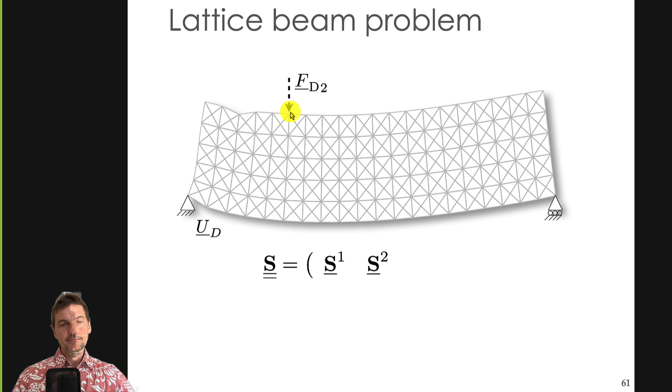And then we can apply it to another point, F2, and get another 1 billion by 1 vector, and apply it to other points on the top surface. Finally we get a matrix which is 1 billion by ns, which clearly has many more rows than columns. What you would like to do is an eigenvalue analysis, but you cannot because you did not compute 1 billion loads, only ns loads, so you don't have a square matrix, you have a rectangular matrix.

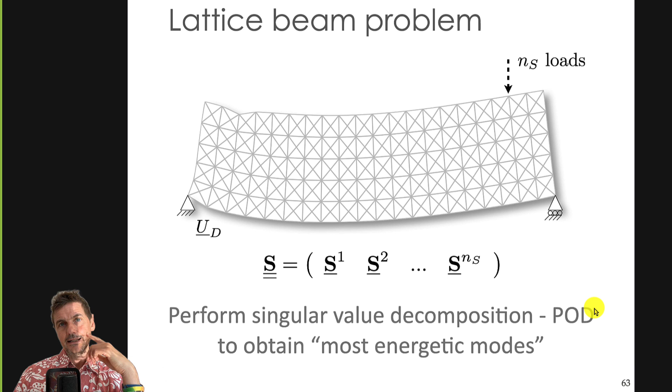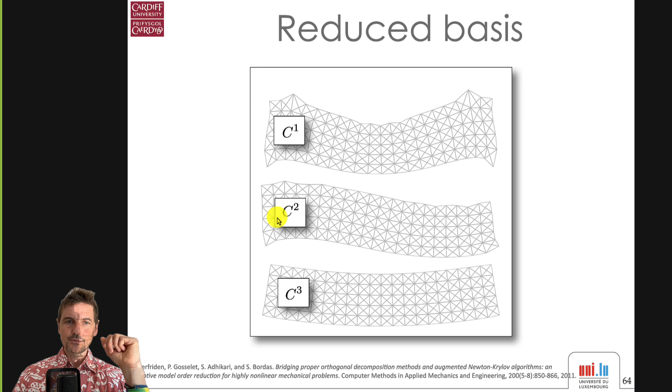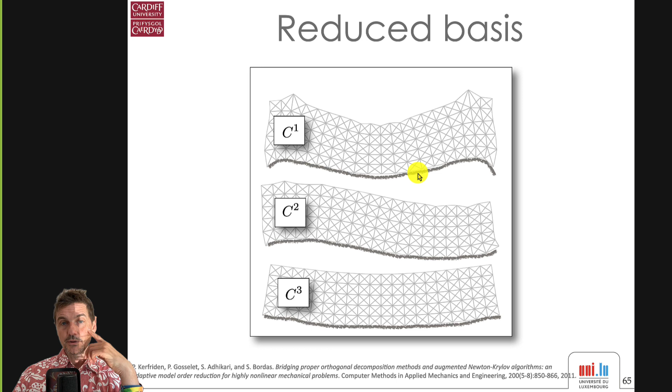So what you will do is a singular value decomposition, which is a generalization of eigenvalue analysis. This is known as proper orthogonal decomposition, because the modes you get are orthogonal to each other according to a certain dot product. If you do an eigenvalue analysis, the first few eigenvalues, or singular values, are the most energetic ones, meaning the most important. So that would be C1, C2, and C3 - you'd have 3 basis functions. If you look at their shapes, they are relatively smooth functions because they are the low order modes, and low order modes are always very smooth and not fast varying.

But now let's assume the client comes after 1 week, and you have pre-computed all these things, and they come to you with a load which is 1 million times bigger than what you computed. Now you're totally done, totally lost, because you're trying to use the data you pre-computed for a whole week of calculations, and this client gives you a load 1 million times bigger, which you could not predict because you couldn't know what the load would be. They gave you no indication. So now what will happen?

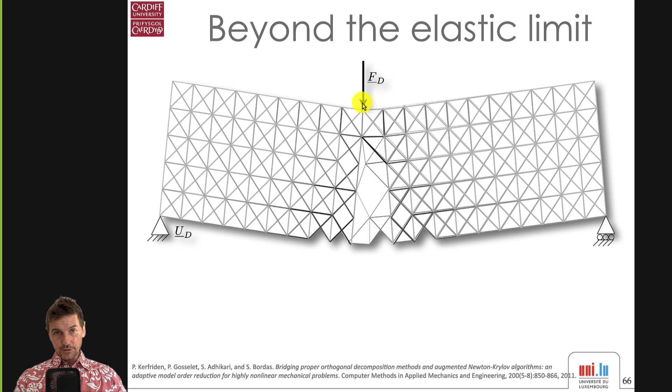Well, what will happen is very unfortunate for you, because all the modes you pre-computed will now be totally useless. Here you have a crack that took place, because the beams in your previous case were not damaging, nothing was damaging, it was all very nice and smooth. Now the beams are broken, you have a kink.

So this is not so nice. So the question is, how can you deal with that? How can you pre-compute something when you don't know what's going to be the question that you're asked. Are you going to be asked to compute with a load which is 1 million times bigger than the load that you've computed with?

In that case, when you have unknown unknowns, this is when the problems start. Maybe you send your spacecraft to a place where the cosmic radiations are huge, and this is damaging the material so much that it breaks. So this kink, which is a jump in the first derivative, this kink here, well, this kink is not smooth.

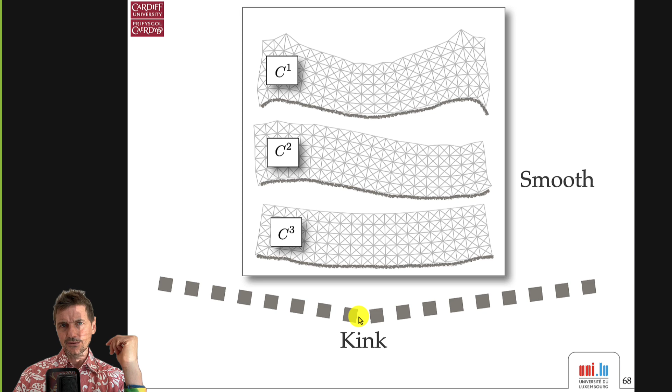So you can try as much as you like to superimpose these three modes to get this function. You will not make it because of the phenomena that we talked about in the approximation theory part of the course. We're trying to approximate a function which is non-smooth with smooth functions, and we know that this doesn't work. You will need to use enrichment in order to make that happen.

And so, in fact, that's exactly what we are going to do. Except that the enrichment will not be partition of unity enrichment that we talked about in the partition of unity course, but it's going to be enrichment of the snapshot. So the snapshot are these three vectors that you pre-computed for small loads that are applied on the top surface.

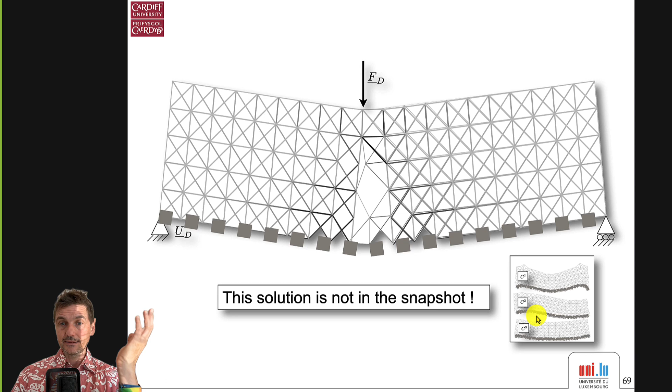And now you're given a huge load which breaks everything down. How can you update the snapshot? Well, the thing is, you can update the snapshot by doing other pre-computations. So this is the way that we did it here.

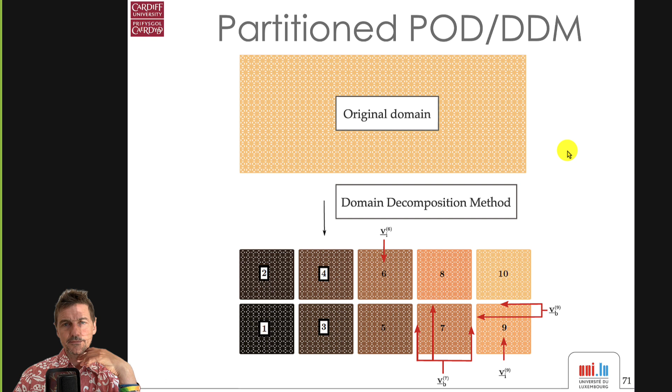There are 3 papers on this that Pierre Kerfriden came up with in about year 2011 and 12, and also with Olivier Goury. So this is a very, very interesting set of 3 papers that I will give you references to a bit later. What we do is we do domain decomposition methods.

So why is that actually useful? Well, let's look at it. Now let's assume that the beam is the same beam as before. Now I just drew much more points than were drawn before, right?

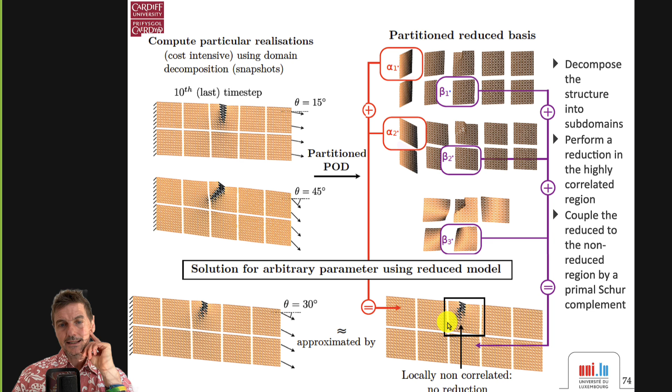In the region where you have fracture, you could not do semi-concurrent optimization, homogenization, because you reached the peak. But in the regions where you were far from the peak, you could do homogenization using semi-concurrent approaches. Here the problem is exactly the same. So this is the link that I've been talking about from the beginning. If you are able to understand this link, I think you will really have learned something today.

And this is what the slides mean. So you have, in the physics-based approach, a representative volume element that does not exist after the onset of fracture. And in the case of algebraic-based model reduction, the problem is not reducible in the fracture process zone, so close to the cracks. So this is why in both cases, you will have adaptive domain decomposition and adaptive multiscale methods. And so this is basically what you should know about this.